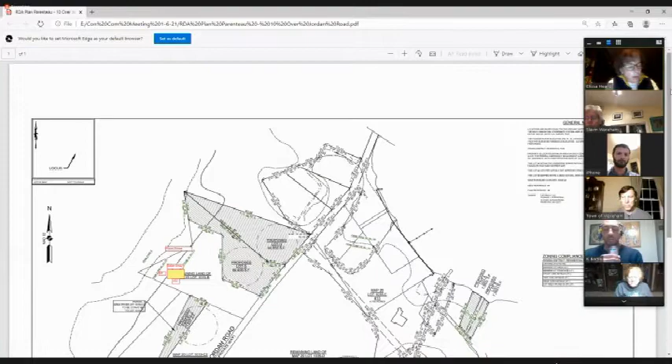Thank you. Is there anybody here to represent this project? My name is Greg Aborn with Plymouth Solar Energy. I'm here. Thank you. Mr. Pachette will read to the project, and then I'll ask the commission members for questions, and then I'll go to the general public. This is Fred Paris from Plymouth Solar Energy as well.

Okay, so the project site is at 10 Over Jordan Road, and this project involves the installation of a ground-mounted solar array within a coastal flood zone. A 93 by 161 foot solar array is proposed within flood zone VE, elevation 19. The solar array is not in the buffer zone to any other resource areas. There is no grade changes proposed at the site.

I did speak with the representative for the project about the plans, and in my opinion there needed to be some additional information shown on the plans. I was told that there would be a revision made that we would get at some point down the road. I did have a couple of questions in terms of what is going to be needed to meet the

flood zone compliance requirements for a structure in that area, in a velocity zone. And I'd also asked that there be something shown on the plan which showed how the solar field was going to be connected, or where it was going to be connected to the street or to a power supply to tie into the system.

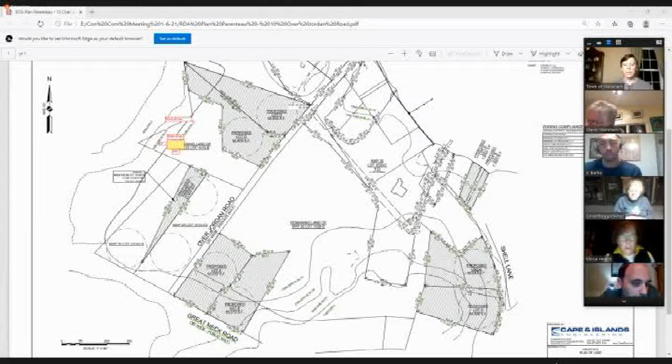Okay, very good. There is an engineer that has been retained, and they fully intend to mark out all of the pathways for conduit to the road, as well as whatever the scope of the extent is. This solar field will be built, but it will not be fully utilized right away because there is some development of houses that are still set to be built. So we understand the details that the town has asked us, and we intend to fully comply, continuing to mark up this same plot plan to meet those requirements.

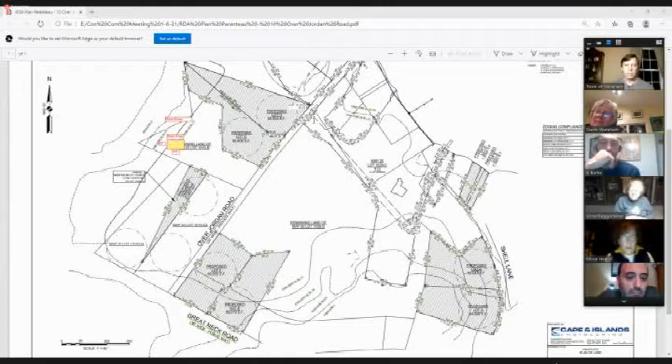Okay. Can someone... David, can you outline this lot that's going to be developed? I'm looking at the plan and I'm not sure where that solar... Except for the fact that you'd be able to see the array from the road. And I know we didn't see you before you took down those things. So I'm curious about that, David.

And I also wonder, because the question was asked of me, if this array is going to be a private thing, or if you're going to be selling electricity in order to maintain it, in order to benefit from it. So is it just for your home, or homes, because I know you're going to build more than one, or is it a business proposition?

It's a double size, pretty big size of an array. The solar is being built specifically for the residents in this neighborhood. It is not the intent to sell any of the energy, but to make this community a division of really high performance homes. The solar will meet the demand of the homes, and there is no intent to sell commercially any of the output.

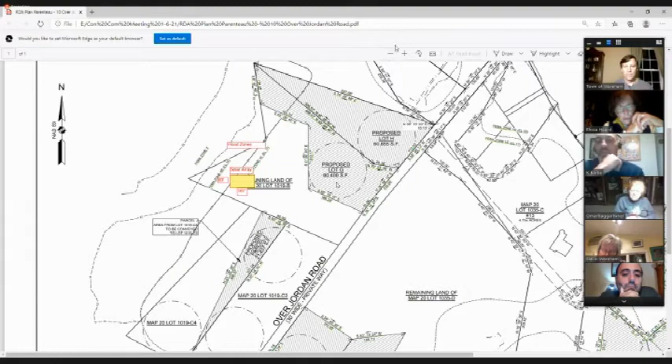Fred, how many homes is this going to support? I think there are 3 right now. Greg, can you comment on that? Correct, we have 3 structures for the Parenteau family. This is to supply their family homes with private energy. Plus the pool area, I would guess. All of it, yeah. So this is 3 homes, but it covers the electrical needs for their entire private property.

So when you talk about it, do you see that now that it's been enlarged, this is going to be a problem with Great Neck Road and the people who live right at that corner? Will this impact them negatively? Are you planning something nice, I guess what was recommended, skip cherry laurel or something like that, in order to block the view of your solar array?

We would be, I kind of think that the view is nice. I haven't heard anyone complain about the view yet. There's nothing on it yet, Fred. This is also all owned by one family. Yes, he owns the entire parcel. I know that. Right now. Well, yes, right now. But we'd be pleased to entertain a visual barrier for the solar, absolutely.

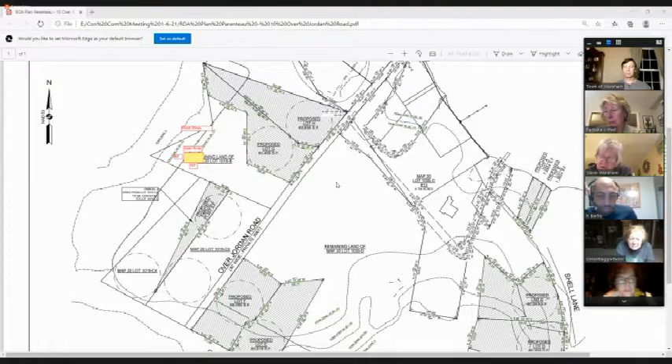Is there anybody else online that would like to speak for this project, or against it, or have questions on this project? Anybody?

Hearing none, I'd like a motion to continue the meeting. Greg or Fred, would the next meeting on the 20th be good for continuation? Yes, I'm sure we could make that. Okay, I'd like a motion to continue the hearing until January 20th. I have a motion. Second. I have a second.

All in favor? Ron, yes. Elissa, yes. Mary, yes. Sandy, yes. We're continued until the 20th. Thank you.

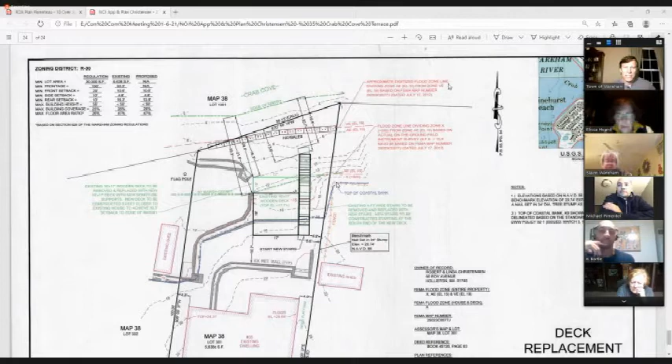Okay, questions on the board? Ron? I'm just kind of looking here with the stairs that Dave is talking about. I think if there's a potential viable alternative to the stairway, I would definitely think that might be something to consider in what we decide as far as what can be done and what can't be done to eliminate some of the building inside of the 30-foot zone, or even, to Dave's point, there looks like there's a couple of landings in the plan. If those were eliminated too, it could potentially push that back. So those are the only things I could see as a concern. Obviously, it's an existing deck that's being pulled further back from the marsh, which is good. So that would be my only concern, same thing as Dave is saying about the stairs.

Okay, Elissa? I agree that the stairs and the platforms down the stairs, if we could shorten that back, I think it would be a good idea. I had another question - is there any part of this staircase that's taken off in the wintertime, so to shorten that deck over the winter, or is it just one piece? I believe it's just one piece. It's not a portable set of stairs. It's a wooden, in-place set of stairs that go down to the water, and it's attached to the deck.

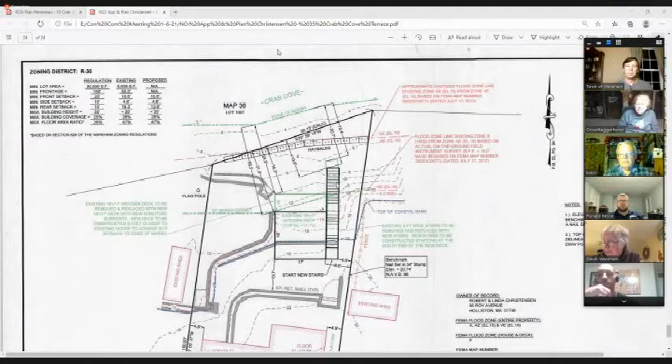Would the commission like to make a motion to close the hearing? Motion to close the hearing. Second. I have a motion and I heard a second. All in favor? Ron, yes. Elissa, yes. Mary? Yes. Sandy? Yes, the hearing is closed.

What do you want? Well, I think I would make a motion to approve the project with the standard order of conditions, and would also like to see, if at all possible, to shorten up that stairway. I understand that there are Mass building codes that have to be followed for it, but if there's anything that can be done to shorten it up in any way, I'd like to see that.

That being the motion. Second. I have a second. All in favor, Ron, yes. Elissa, yes. Mary, yes. Sandy. Yes. Okay.

Michael, you got the project. Robert and Michael, before you start anything, please work with Mr. Pachette to get all your proper paperwork before you start. Okay? Very good. Thank you so much. Thank you. Thank you very much.

Notice of public hearing pursuant to the provisions of the Massachusetts Wetland Protection Act, General Laws, Chapter 131, Section 40, and the Wareham Wetland Protective Bylaw, Division 6. A public hearing will be held on Wednesday, January 6, 2021 at 6:30 p.m. on the notice of intent for Mary Beth and Roger Holmes, care of JC Engineering, Inc., 2854 Cranberry Highway, East Wareham, Mass. 02538, to construct an in-ground pool and patio expansion located on Assessor's Map 2, Lot S1-A, 8 South Water Street, Wareham, Mass.

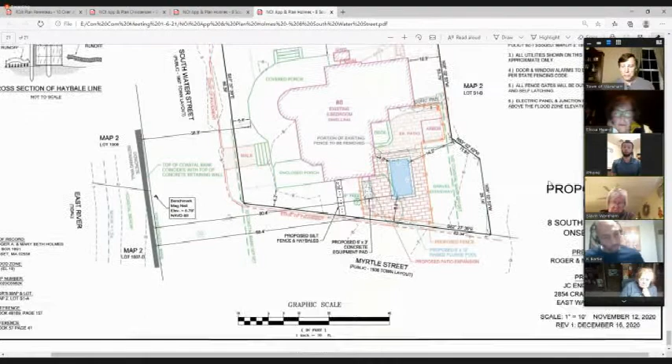Okay, Sam, any comments? I think Dave had mentioned everything. Maybe one thing I would add is that we did have the project staked out this morning, so you can get a visual if you drive by.

Thank you. It would have been nice if it was staked out a while ago, by Monday by noon. Once we receive a notice that there's a hearing coming up, there are several members who like to go out and visit the site. And it would be nice if they were staked out once the hearing has been sent to the newspapers.

I think we need to do it. Not everybody has Wednesday afternoon to go looking at staked areas. It should be done by Monday noon.

Because Sam, honestly, if this happens again, we're going to very well ask that the project be continued until the stakes have been there for at least a week. Okay, I will note that. Okay, so please let everybody at JC Engineering, and I'll say the same thing for GAF and everybody else, know we want those stakes there at least a week before the hearing.

Okay, questions? Sam, you said you're good with what you've heard from Dave? Correct. Yep. Okay, questions? Ron? Yeah, I mean, first I just want to ask, what is a plunge pool?

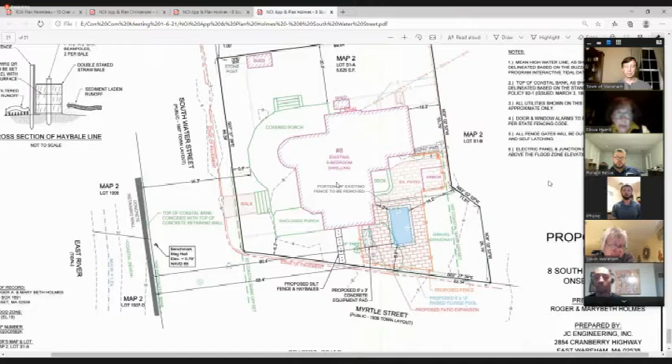I think that it makes sense, either pervious pavers or some other way to get the water to just drain down. The grade of the land does slope to the westerly side of the property, and between the street and the proposed projects, there is a strip of well-maintained grass in that section with a few shrubs there. So that is in place as well.

Okay, Mary, any questions? No question. Kwame, no questions. Michael... I'm sorry, I don't remember your name.

The engineer asks: where are those shrubs again, between the plunge pool and South Water Street? Correct, almost on the corner of the enclosed porch shown on the plan, where it says the proposed silt fence and hay bales are. The shrubbery right now is going to be taken out because that's where the pavers are going to go.

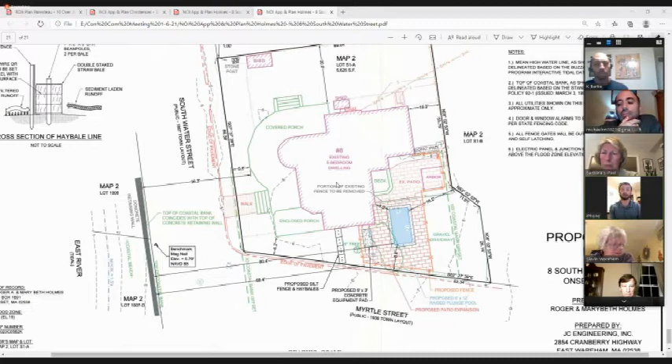There's some additional shrubbery on the southwesterly corner of the lot. That's what I thought he said. There was more there, they were very minor. We weren't showing those on the plan, but they are there. They exist, nothing new.

Is there anybody on the call that would like to speak to, for, or with questions on this project? I'm hearing none. Before we close the hearing, is everybody all right if we indicate that we want pervious pavers added to the conditions?

Yes, okay. Those are the shrubs that are going to be removed. And the tree's going to go, and the stakes that are there mark the limits of the new pavers and equipment pad.

Okay, I heard nobody online wanted to speak to this. I'll take a motion to close the hearing. So moved, motion to close. Second. All in favor: Ron, yes. Elissa, yes. Mary, yes. Sandy, yes. The hearing is closed.

Someone wants to take a stab at the order of conditions? Okay, so I move that we accept this project with the condition that permeable pavers are used for the patio, and that the water in this pool is never deposited...

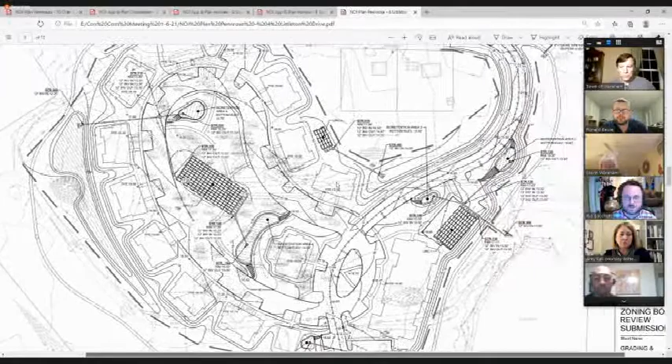I think the expectation is that it'll probably be continued. There had been some comments we received recently from the fire department requesting access to the rear of our senior building. Yeah, right there. So not a lot of space there. That's right, there's not much space there. And right now, Joe, I don't know if you have anything to add.

Our civil engineering team is looking at how to resolve that, maybe by shifting things. I think, Rio, we had looked at it. My name's Joe Henderson with Horsley Witten. We had looked at adding an access point behind the building.

As part of that, we actually think we can pull the outfalls outside the 50-foot buffer. So Dave, as you said, it looks like we can probably do that also, but we are currently looking at putting an access road behind the building. It's not been finalized, as Rio said, we just received the comments from the fire department yesterday.

Right, and I can echo what Joe was saying. We have an in-progress draft plan as of this afternoon that will pull all work outside of the 50-foot buffer, including both outfall pipes and potentially the walking path. If the commission is familiar with the site, it was subdivided sometime in the 1970s but failed, though the roads are already cut into the wooded parcel. Part of the existing dirt roadway cuts through the 50-foot buffer.

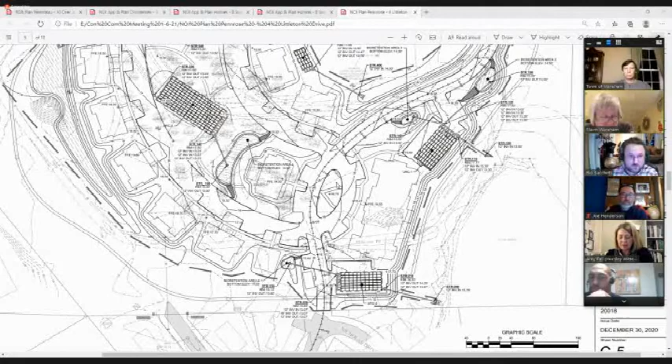Okay, anything else before we ask? There's a lot of questions here, a lot of work that still has to be done. Ron, any questions? We are going to continue, but Ron, anything?

I mean, Dave threw a lot out there. I think there's a lot of questions to be answered with the information the town got, and also the things Dave brought up. I'll wait to see the revised plans to really think about the questions I have, but there will be many. At this point I'm just going to hold off so I can see more information come through. Elissa: not at this point, thank you.

Mary: waiting for more information. Kwame: there's a lot to digest, so I'll just wait until there's more information. Thank you.

Michael: just really quickly, sometimes my computer can go unstable at times. I just want to confirm on the map where it shows the big building numbered 12 - that's going to be the one with the 44 senior single housing units. Is that correct? That's right, that's correct. Okay, I just wanted to confirm, thank you.

Okay, here's a question for you. Never mind, sump pumps is another discussion for another commission.

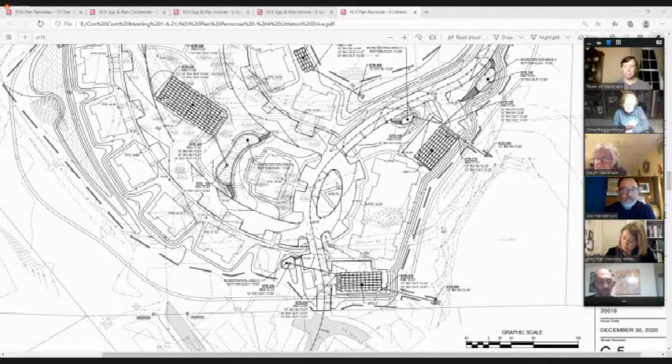Just to clarify on the stormwater system, the outfall pipes are really for an emergency situation. There will be no significant water coming out of them. I think when Greensill looks at the stormwater design, they'll see that the idea is for our post-development flow to be less than our pre-development flow, and I think we've demonstrated that. So we're not generating any new or significant amount of water going into that area.

In terms of an outfall, though, whether the thought is there may be little to no flow coming out of it or not, we have to regard it in the worst case scenario that there will be flow coming out of it. So that's how I recommend the commission look at any project, not just this one, but any where there's an outfall proposed - we have to consider what the impacts would be with flow from that outfall pipe.

Now, those two outfall pipes are coming from a subsurface collection point underneath two large parking lots and down the streets in front of the community building. Is that how it will flow? Yes, it will flow from our bioretention systems, which are there for water quality treatment.

And then from those bioretentions, it will go to the underground stormwater chambers for detention and some infiltration. In larger storm events, it'll discharge some water, but that's all quantified in our stormwater management design calculations, the volume of water. It's very insignificant except for maybe a little bit more during a 100-year storm event.

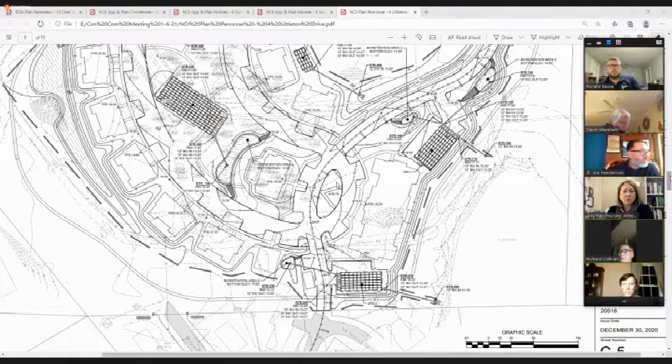We have a waterway, a swale basically, that directs drainage through our property. It goes under Rockmarsh Road itself and basically flows toward the project site. About 10 years ago we had a severe storm, and that area was basically blocked, which caused a backflow onto the properties. So I was wondering what measures are being taken to first delineate that area as far as maintaining the existing topography.

As well as making sure in the future they don't block any flow onto the property that exists now. I'm trying to find your street on the map. Rio and Amy, any idea where that road is that he's talking about? Rockmarsh Road is off of Brown Street.

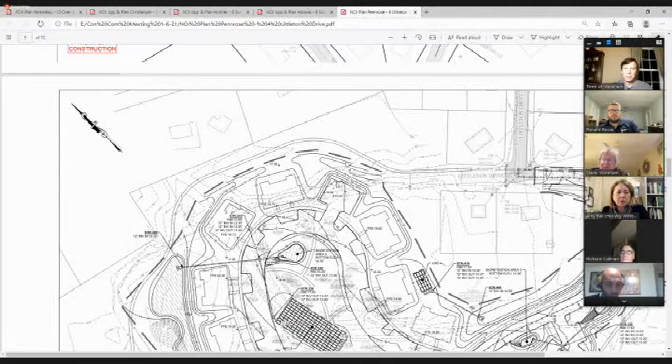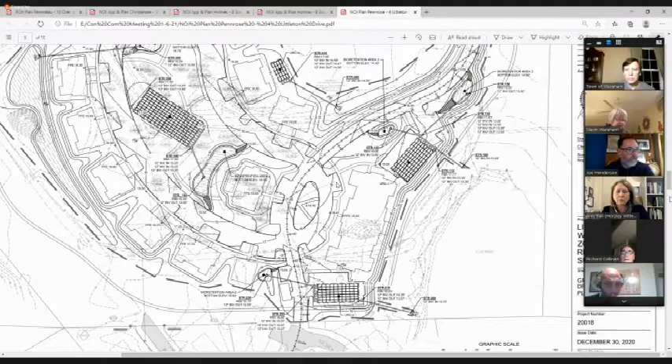But there's still a lot of woods between that and where they're planning to develop, right? That is correct. But we just want to bring it to your attention, because there's an existing flow onto the property and there was a problem in the past. So obviously we want to make sure that doesn't occur again. Yeah, we look at off-site contributions to the site. Whatever that is, good to know. We can in fact look at that a little further. I think the area is a wet area, but I'm not sure it's technically wetlands.

So it flows down through the cul-de-sac and on back into the property? No, it flows under the cul-de-sac. It ultimately flows between units 6B and 8A on Rockmarsh Road. Okay, I guess we'll give them something to look at. Okay, thank you.

Okay, anybody else? Thank you for your comment. We need to control that water flow. My name is Pam Smith, I live at 59 Swifts Beach Road. I'm one of the abutters, I guess.

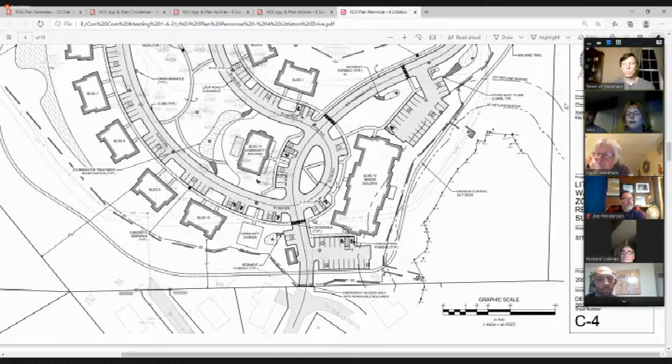I just wanted to point out that that is a very wet area. I know usually in the springtime the water table is right up to the top and we all get water in our basements. I know it does, the Flax Pond if you call it that, has a lot of wildlife there: bullfrogs, tree frogs, peepers, ducks. So if you could keep consideration with a barrier, over a 50-foot barrier, I just don't want to see that getting polluted by runoff from the trails he proposes, with rock salt or any kind of litter, debris, fertilizer, pesticides. Thank you.

So I'm just concerned with the water table and the pond being polluted. I know as it is we're going to lose all the woods that are there, and right now it is home to a lot of other critters and animals. It used to even have lady slippers, which is now an endangered flower. Yep, they're hard to come by.

One of our standard order conditions is that all fertilizer be low nitrogen, slow release nitrogen. That's an attempt to try to reduce the amount of water runoff of chemicals into our wetlands.

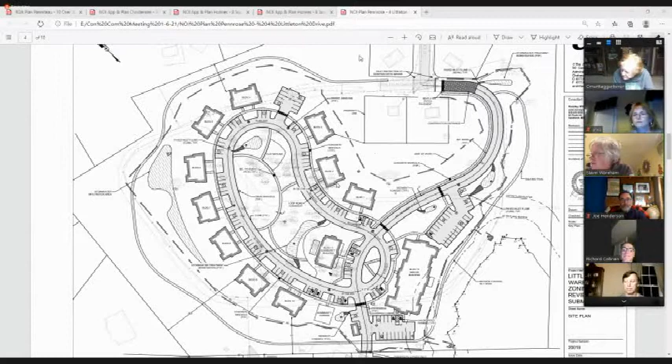Anybody else want to comment before we ask for a continuance? I'll take a motion to continue this until January 20th. I have the motion. I need a second. A second, thank you, we're going to continue.

Ron. Elissa, yes. Mary, yes. Sandy. We're continued until the 20th.

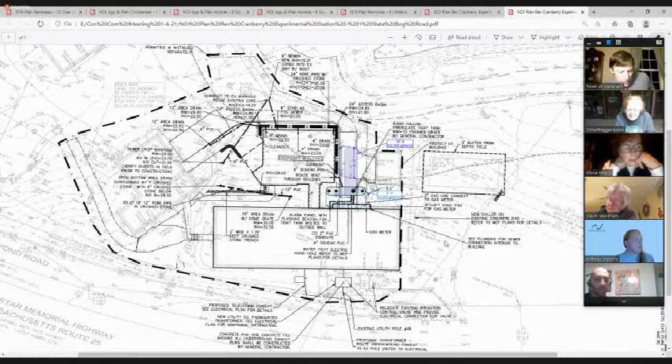This project site is at 1 State Bog Road, and the project involves the construction of an addition to a lab building and associated site work in the buffer zone to bordering vegetated wetland. A 42 by 57-foot building is proposed to add on to the existing building at the Cranberry Experimental Station. At the last meeting, we had continued the hearing because we did not have the DEP file number for the project.

We have since received that. But in the meantime, since the last meeting, we had gotten an email stating that there was a proposed revision to change the size of the proposed underground storage tank used to collect lab waste at the site. Because of the size of the tank proposed, that required the tank orientation to be changed so that part of the tank would now be within the buffer zone, whereas previously the tank was outside the buffer zone. So that's why we have this revised plan. I'll let the engineer go over that.

The last plan I had gotten was sort of a draft, and I'm not sure, Brittany, if you have the final plan that's stamped and all that. Yes, so I sent those to you pretty late in the day, sorry about that. But we did have stamped plans sent to you that show this tank location as well as a settling basin location in case they need to do dewatering in order to install this tank.

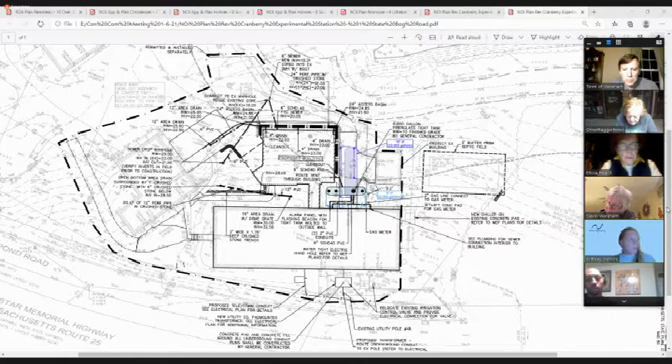If you want, I can share my screen and show that plan. Sure, hold on one second. Okay, go for it.

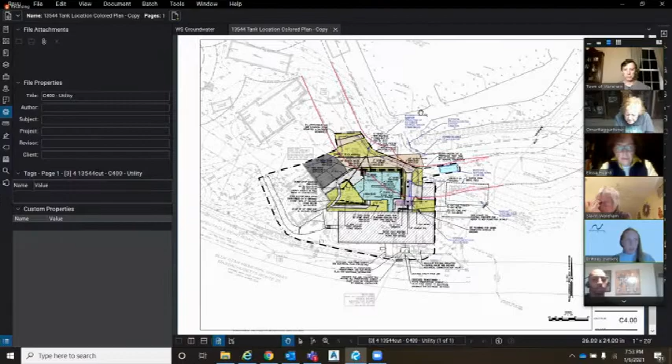This is a colored version of the plan that I sent you. So we see the new tank location here, extending into the 100-foot buffer. And then we're showing a settling basin over here with some erosion control around it. We're not sure if that will be necessary or not, but we wanted to have a location shown on the plan. Any soil removal needed to install this tank or the settling basin will be stored in the parking lot outside of the 50-foot and 100-foot buffer.

Based on the plan change with the new tank, I don't really have a problem with that. The work's still outside the 50-foot and it's going to be a tight tank. My other question, which they've addressed, is to have some measures in place in case they do need dewatering, because the excavation hole for this new tank is obviously going to be much bigger and deeper because of the tank size. So they are showing the proposed dewatering containment area. Now that we have the DEP file number, I would recommend the approval of the project with the standard conditions and the added conditions for dewatering at the site.

Anybody would like to speak to the project that Dave didn't cover, or any addition? No? Okay, questions on the board, Ron?

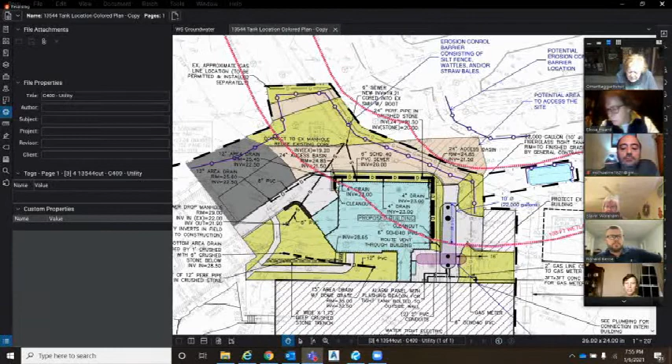Is there anybody on the line that would like to comment on this project? Hearing none, like to take, someone make a motion to close the hearing? Motion to close. I have a motion and I need a second. Second, thank you. To close the hearing, Ron? Yes. Elissa? Yes. Mary? Yes. Sandy? Yes, the hearing is closed.

I need a motion to do a standard order of conditions with the possible dewatering site. Move to accept the project with a standard order of conditions, as well as the possibility of dewatering when the tank hole for the tank is dug.

Okay, I have that motion. Second. I have a second. All in favor, Ron? Yes. Elissa? Yes. Mary? Yes. Sandy? Yes, approved.

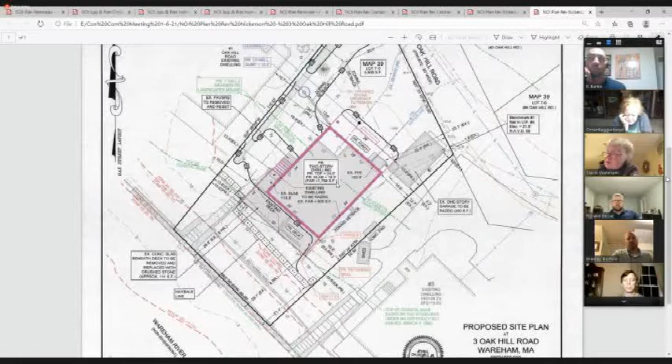So for this project, I hear nobody on the line. I'll take a motion to close the hearing. Motion to close. I have a motion. I need a second. Second. Thank you. To close the hearing: Ron, yes. Elissa, yes. Mary... Sandy, yes. The hearing is closed.

Okay, I need a motion for approving the project with a standard order of conditions. Motion. I move that we accept the project with standard orders of conditions and nothing else, I think. Second. I have a motion, I heard a second. All in favor: Ron, yes. Elissa, yes. Mary... yes. Sandy, yes.

The project is approved. And so Brad, speak to Mr. Pachette before you start the project. Okay, will do. Thanks again.

Thank you. We're back to the two Stacy projects. Good evening, all. Hi, Stacy. I was hiding. Which one would you like to handle first?

150 Tihonet. Okay, we're gonna do 150 Tihonet, not 140, because that'll be a continuance, whatever your preference is. Okay, we'll do the 150. Stacy Minahan with Beals and Thomas and Zach Farkas with Borrego Solar Systems is here as well.

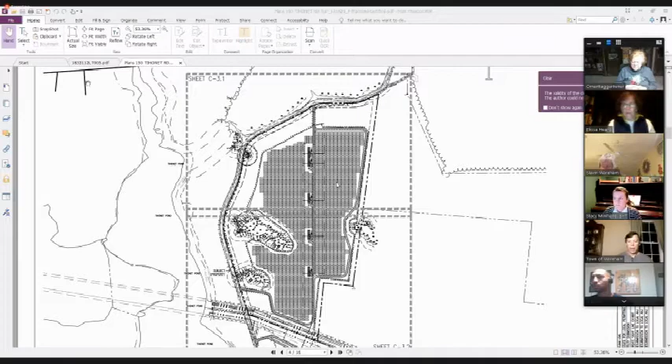In terms of that, I'd recommend again that the 50-foot no activity zone be maintained regardless of whether there's an existing road through that area, because there's going to be a fence around that part of the site. I'd want any fence line to be outside the 50-foot no activity zone. If that's how you've revised it, I'm okay with it. But if you're still proposing to use that road for access and fence it in within the 50-foot zone, I'm not okay with it, and I'd recommend against that. That was going to be my comment.

So Sandy, can we ask if that's as Dave has said? We're waiting for new plans. Stacy and I will take a look and make sure we communicate that feedback back to our design team. Off the top of my head I don't recall exactly how it's designed, but with Dave's clarity there's certainly no lack of understanding on our side.

So we have a request to continue until the 20th of January. Do I need a motion? It's already been moved and seconded. All in favor - Ron, yes. Elissa, yes. Mary, yes. Sandy, yes. It's continued until the 20th. Thank you all, have a nice evening.